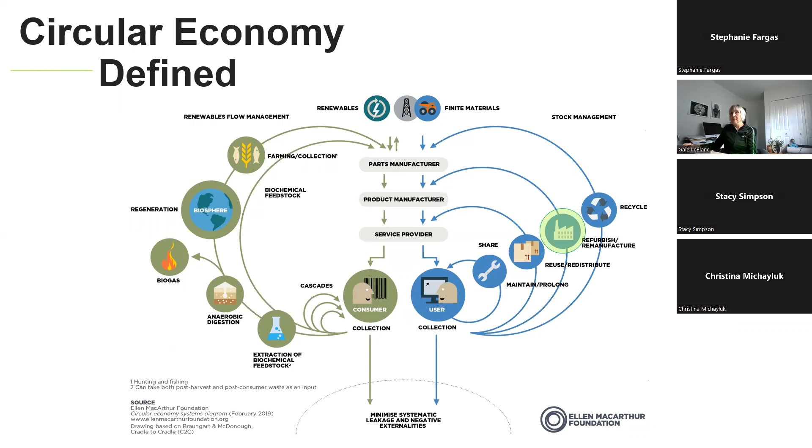So for the building sector, the circular economy principles must be at every level in the building process. When applying circular design principles, the idea is to actually close the loop by identifying the output of one system and connecting it to the input of another system. Without cooperation at every step, it's not going to happen.

I'm going to go through each responsibility or each principle. So for architects and designers, you provide and sell the vision to the building owner. So circular design actually starts with them turning concepts into designs. Architects must select the right materials, which takes a lot of research.

They must design for adaptability and flexibility to create spaces that can be easily repurposed to meet the needs of a building that is constantly changing. Designing for flexibility is just so important since it helps reduce the need for constant renovations.

So much goes into the design of a building that can actually be tied back to circular economy, such as energy efficiency, natural lighting and ventilation. Incorporating passive design strategies like proper insulation, natural ventilation, and solar orientation is essential. Also, even considering integrating on-site renewable energy systems like solar panels or wind turbines.

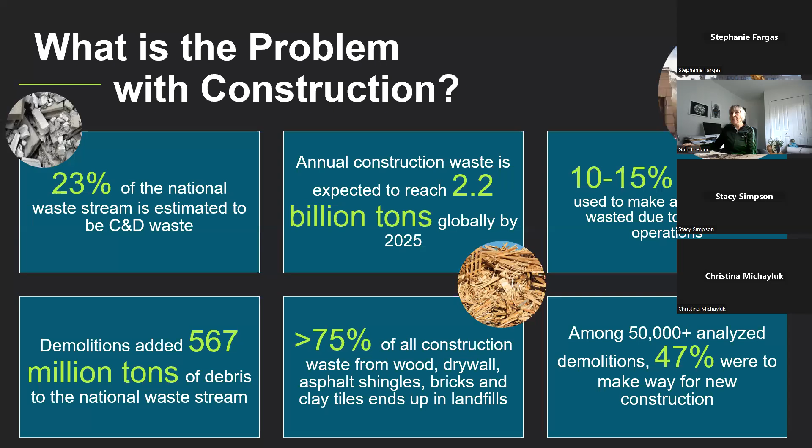Well, just because there is a problem with current construction standards doesn't mean that there has been no progress. Recycling or reusing materials reduces disposal and transportation costs, so it could be used more frequently on job sites. Efficient identification and sorting of materials is an important factor in managing the diversion of construction waste from disposal.

Job site protocols are actually usually identified in contracts and subcontracts and implemented at the project level by superintendents and project managers. Superintendents and project managers must use product specifications prepared by architects and engineers for diversion rates. Building owners and contractors may also have their own guidelines and policies. So it really is a team effort, and communication is vital.

Wood debris can be salvaged and repurposed for new construction products. Cement and bricks are usually crushed and reused. Metals like steel, aluminum, and copper can be sent to local metal scrap yards. And then drywall can either be returned to a USG manufacturing plant, or it can be incorporated into the soil or other products. Actually, right now, USG Rainier manufacturing plant uses about 10% of the clean wallboard waste back into their manufacturing process.

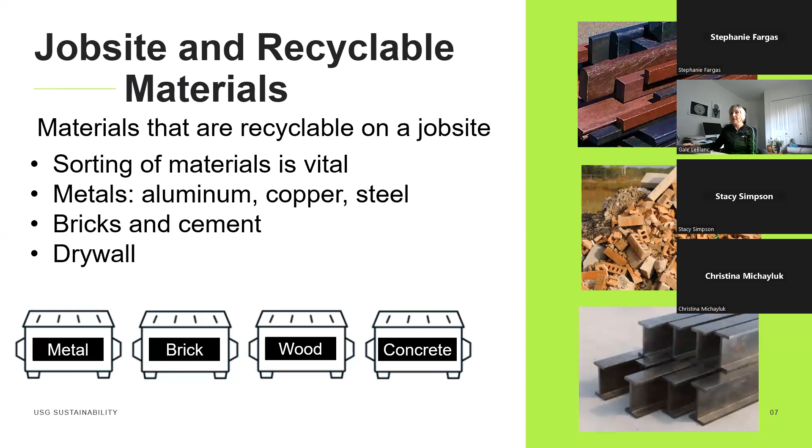Well, there are 6 different pathways to a circular economy: maintenance, reuse, refurbishment, remanufacture, recycling, and composting. My focus will be on how I can help as a manufacturer. So I will be discussing the specific pathways of reuse and recycling for remanufacturing.

The first option is to use a manufacturer's reclaim program, where the product is accepted back to the manufacturer so that the waste product can be turned into a new product. The second option is the reuse of a product at a different job site or location.

I am very aware that demo waste is a huge issue, especially for wallboard. But job site waste is also a big area of concern for wallboard waste. The consensus is that 11% of the wallboard purchased for a job will go to the landfill. Through careful planning and design, I have heard some job sites reduce this number to 8%, but that's the lowest

that I've ever heard. Most USG wallboard manufacturing plants have had the machinery to recycle manufacturing waste into the wallboard line for over 50 years now. It does take quite a bit of manufacturing to recycle wallboard back into the manufacturing line. So the carbon emission savings from recycling wallboard is going to be mostly from the end of life carbon, or when the product is landfilled.

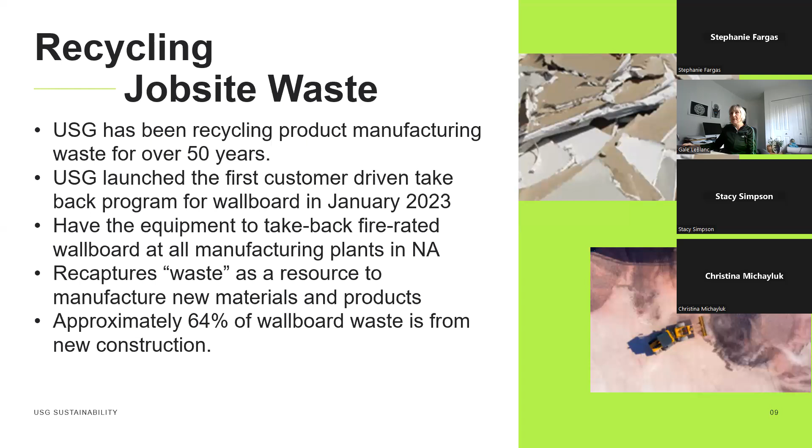It was in January of this year that we developed a public take-back program for all of our wallboard manufacturing plants. And this program has actually been my vision for the past 10 years, or since I've been employed at USG. So as said, in January 2023, we at USG started a public program to take back clean wallboard construction waste or scrap product. This means that the wallboard waste that is coming from the job site is clean, source separated, and is USG branded.

I often get asked about why just USG branded wallboard. We have to warranty the finished product, and we have a very rigorous raw material screening process where we test for impurities and heavy metals. I'm not saying that other wallboard manufacturers don't follow some type of rigorous screening. I'm just saying we don't know.

Well, the USG Recycle program is only available for regular and fire-rated wallboard. We are investing in the technology required to recycle glass mat and mold tough resistant boards. But at this time, it's just these types of wallboards that are acceptable. We can only use up to 10% of reclaimed wallboard to manufacture new wallboard, and this is mostly because of the fire rating standard. But when paper is separated from the reclaimed wallboard, there will be no limitations on the amount of reclaimed gypsum that we could actually use back into the manufacturing process.

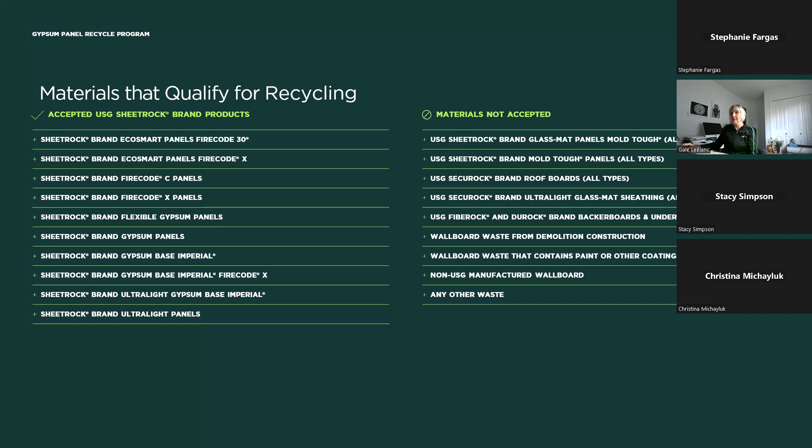So every USG wallboard plant has the resources or the technology to take back wallboard waste. Right now, we have 3 functioning manufacturing plants in Canada, and it will soon be 4. So I wanted to share some best practices from successful customers. Sorting has been the most difficult task since it is very difficult to keep waste from co-mingling on the job site. To maintain that, the container only contains wallboard scrap. Most jobs just assign an employee to police the containers.

Another customer had a plan to partner with a waste container hauler, and instead of sending each load to the plant, they plan to use a dump hub and then deliver the job site waste wallboard to the manufacturing plant when the actual large container was full.

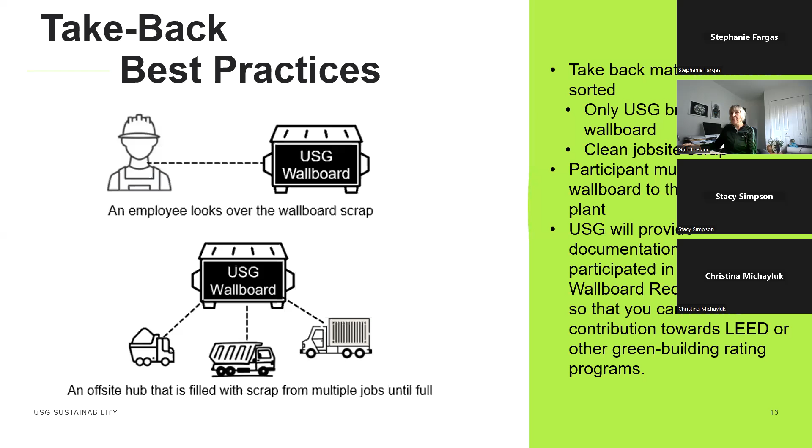Demolition waste options for wallboard. We do not currently have a wallboard demo waste program available, but I did want to mention options for wallboard demo waste. Anyone who has ever been to a demo construction job site understands the abundance of wallboard waste. Wallboard is frequently used in buildings and is approximately 14% of the demolition waste. Construction wallboard waste is usually free of contaminants, so it makes it a lot easier to use back into the

manufacturing process. Demolition wallboard could possibly be contaminated with toxic substances such as lead paint or even asbestos, depending on the age of the building. Contaminated wallboard waste does not have many options. It usually has to be landfilled. But for demo waste that is not contaminated, there are some recycling options: it could be recycled into cement or flea powder or grease absorbent, athletic field markers, and even animal bedding.

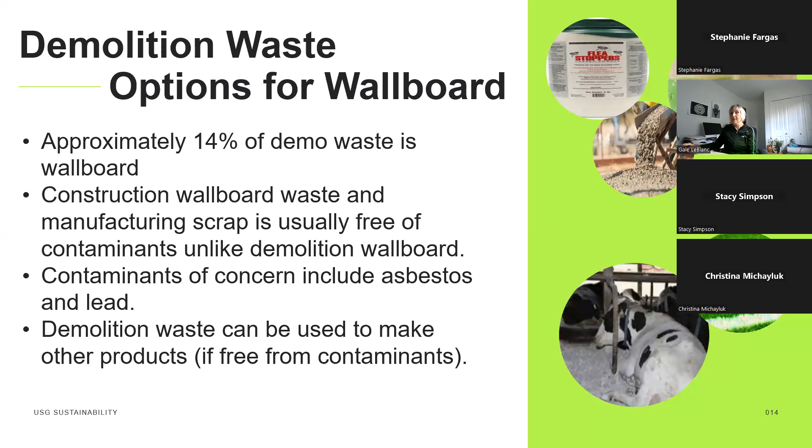Now I am shifting from wallboard to acoustical ceiling tiles. So we have been recycling demo waste ceiling tiles since 2009. We remanufacture the waste material into new products. The process for recycling is a bit stricter than the wallboard, and this is just due to the nature of the material. The used ceiling tiles have to be stacked on pallets and secured for transit. And then USG will cover freight for full truckloads. So the majority of our ceiling tile products are recyclable. We cannot take back fiberglass, wood, or painted panels. And of course, we can't take back any type of hazardous material.

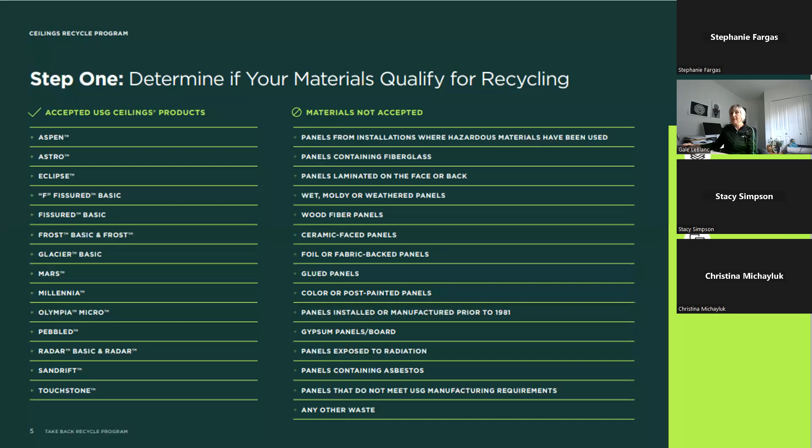We are aware that not everyone can participate in manufacturer take-back programs. It is a program that takes more manpower and time, so it will be challenging. We do not have manufacturing plants by each major city or development. So at a certain distance, the reduction in carbon emissions will be a bust, and it will not be worth it. If taking back to a manufacturing plant will cause more environmental harm, then we will be forced to refuse the drop-off. Fortunately, this has not happened yet, but we do see this as a scenario that we may face in the future.

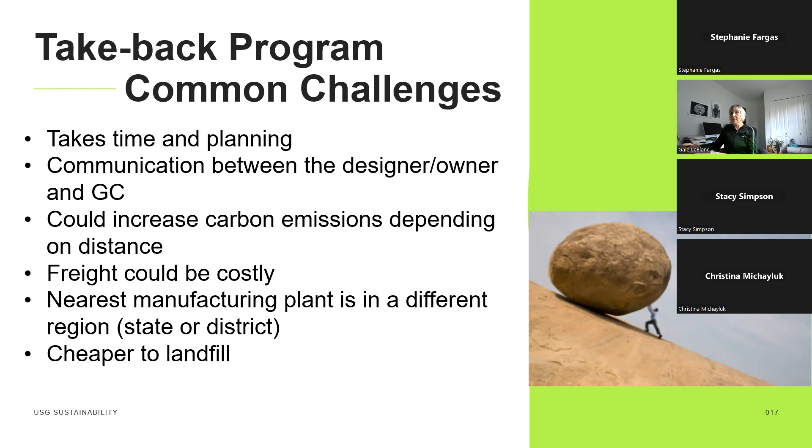So moving on to product reuse. Reuse is simply the reuse of a product without transformation. If you are looking to target carbon reduction in a building, this is the way to do it. When you reuse a product, you are eliminating not only the raw materials, but the manufacturing and packaging carbon emissions as well. This is an area that demands innovation and a different mindset for design.

For manufacturers, we create a product that is resilient enough to be able to be disassembled and withstand re-installation. A product's life is no longer a straight line from being produced to being consumed and then discarded. For building designers, it demands a change in mindset and a good understanding of the product's function.

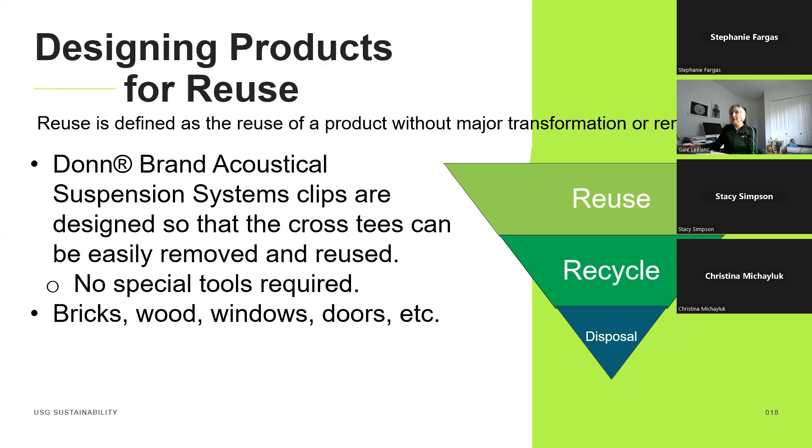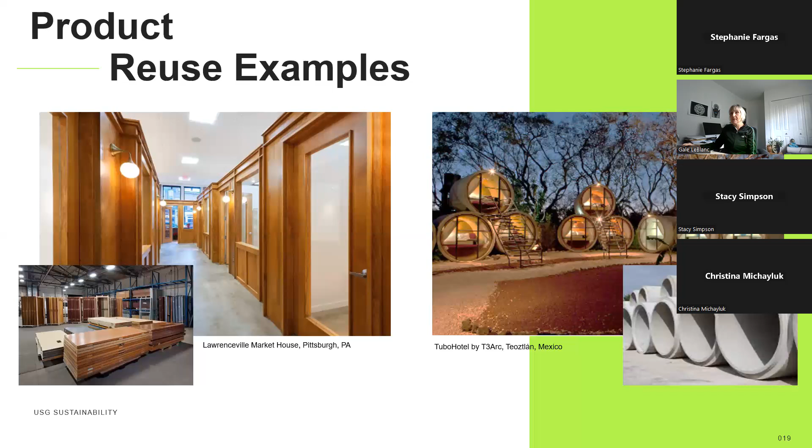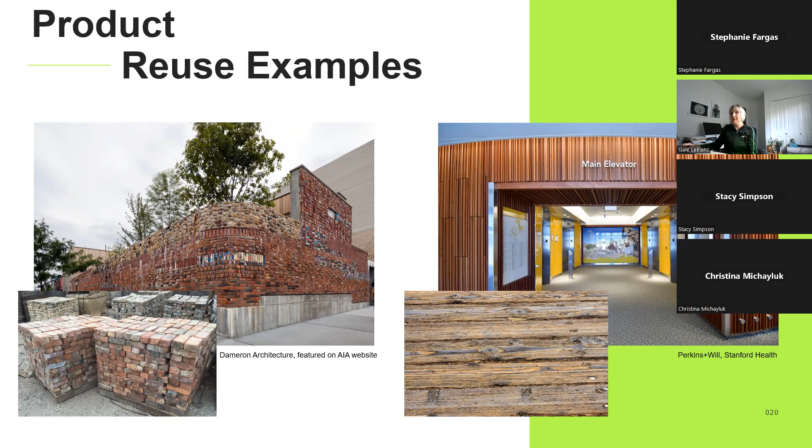So a circular economy is aimed at eliminating waste and promoting the continuous use of resources. Using recycled materials is another way that a manufacturer can support a circular economy. Using recycled raw materials removes the extraction and transport of new raw materials and the carbon emissions associated with these processes.

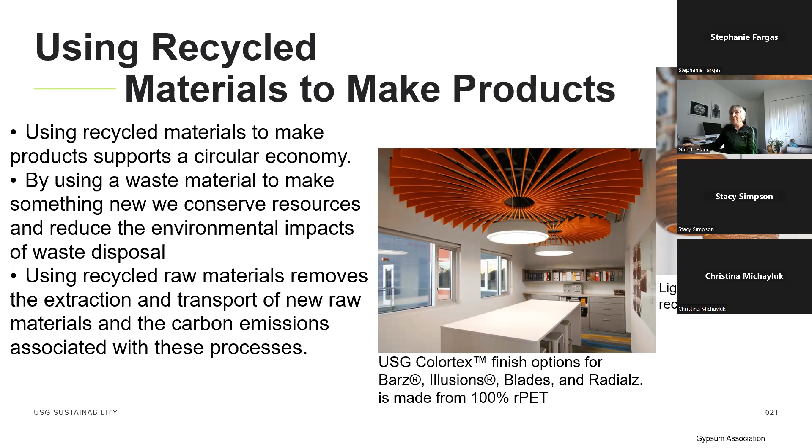Packaging is one of the most difficult areas when considering circular economy processes. Everyone owns something that is plastic. It's a material that is everywhere, unfortunately, even in our oceans. The major problem with packaging plastics is the functionality. Most plastic packaging is manufactured and treated as a single-use item.

Unfortunately, the problem with packaging goes even deeper, since the infrastructure to recycle plastics is really non-existent. Even when plastic is recycled, it is expensive to collect and sort. There are thousands of different types of plastic, and none of them can be melted down and processed together. Plastic also degrades, and the more plastic is reused, the more toxic it becomes.

Plastic manufacturers have little to no incentive to recycle or reuse their products at this time. It's far less expensive to manufacture most types of plastic from scratch than it is to recycle old plastic into something new. Companies must commit to using post-consumer resin or an alternative like cardboard wherever possible.

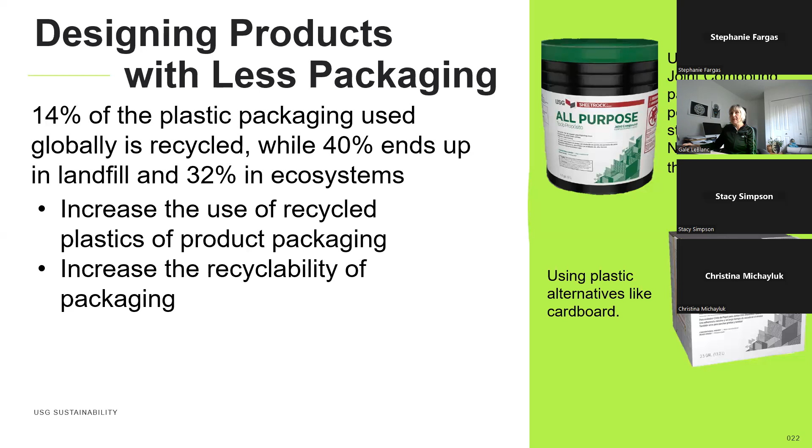So I tend to look at circular economy as a holistic approach. It addresses two very important issues at the same time. We reduce our carbon emissions or embodied carbon of products, and we reduce the use and waste of our planet's finite materials. Embodied carbon looks at the carbon emissions that are generated by the production of the building itself. This covers the extraction of the raw materials that are used, their transportation to a manufacturing facility, manufacturing, the transportation of the products to the construction site, and the installation of the products.

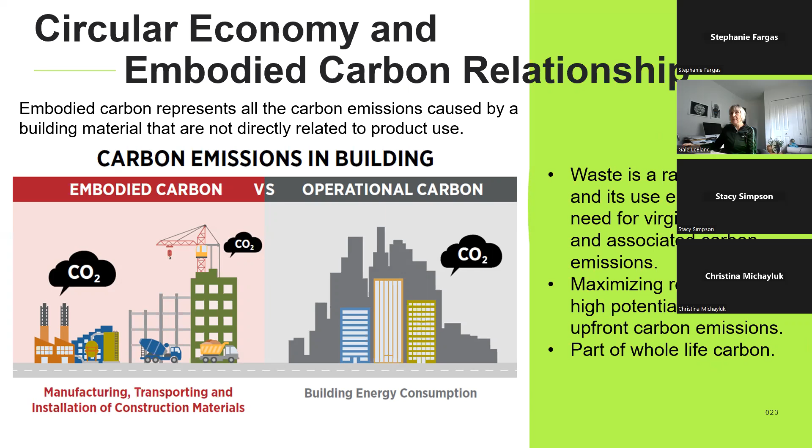Well, efforts to reduce the environmental impact of the construction sector have long focused on operational carbon, but due to the rapid decarbonization of the energy sector, which is the greening of the grid, occurring at a rate of 4% per year, embodied carbon is becoming recognized as a dominant source of carbon emissions.

Several strategies can be employed to reduce embodied carbon, such as participating in manufacturer take-back programs or reusing materials. The carbon emissions associated with the product disposal and the use of new raw materials in manufacturing, of course, will be avoided then. We cannot achieve the emissions reductions necessary to avoid the worst impacts of climate change without implementing circularity.

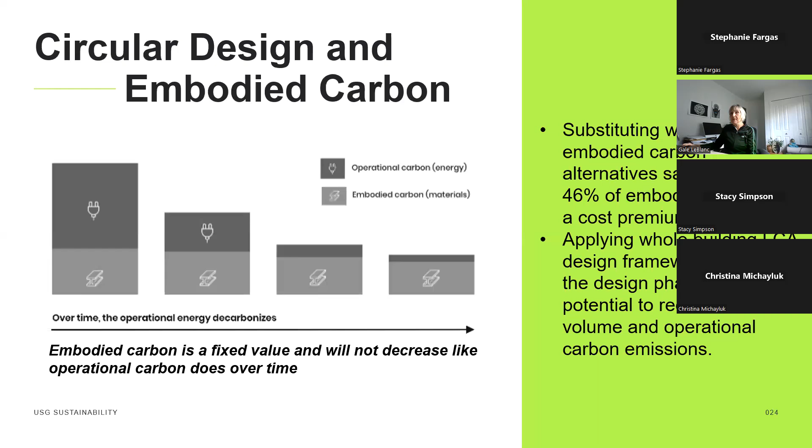So it is our job as manufacturers to be transparent about the embodied carbon of products. We produce life cycle assessments and publish environmental product declarations to provide the environmental effects of manufacturing, which includes the reporting of embodied carbon. We also are responsible for displaying our EPD information on third-party sites like EC3 tool and within our BIM models.

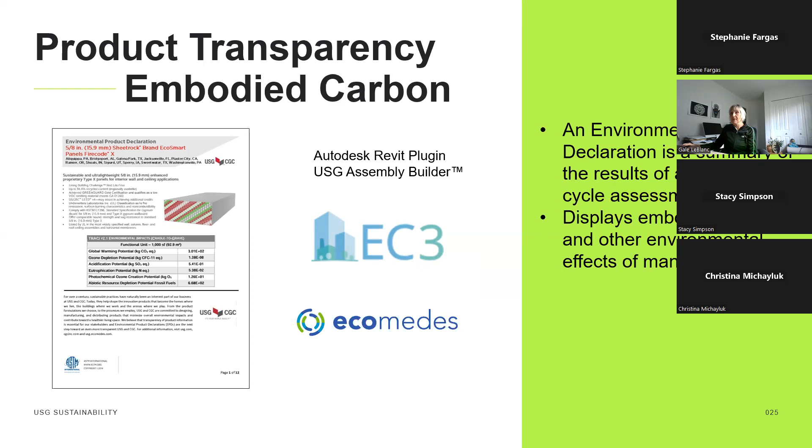So this is just for demo purposes only. I wanted to just display the differences in embodied carbon as more reclaimed material is added to manufactured wallboard. It is USG's long-term goal to recycle all gypsum board. This would be both clean waste and demo waste. So at some time, no gypsum board would be landfilled.

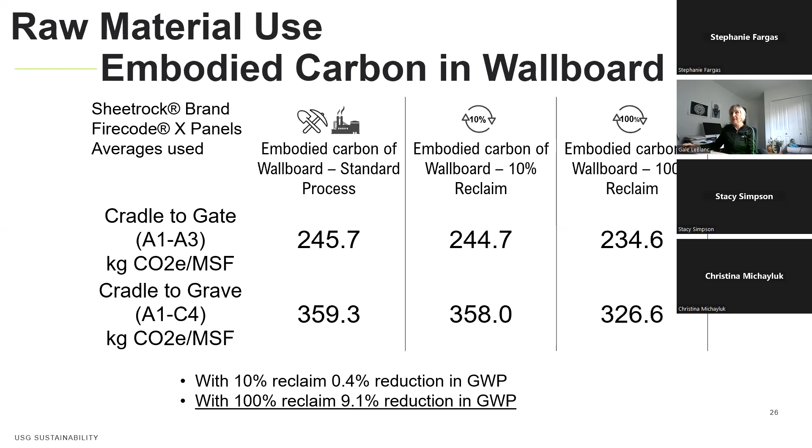So this is an example of a real-life job that participated in the wallboard recycle program. The job site in Des Moines, Iowa, recycled 20 tons of USG wallboard job site waste back to our plant in Sperry, Iowa. And it actually resulted in a decrease of the A1 to C4 carbon by 17%.

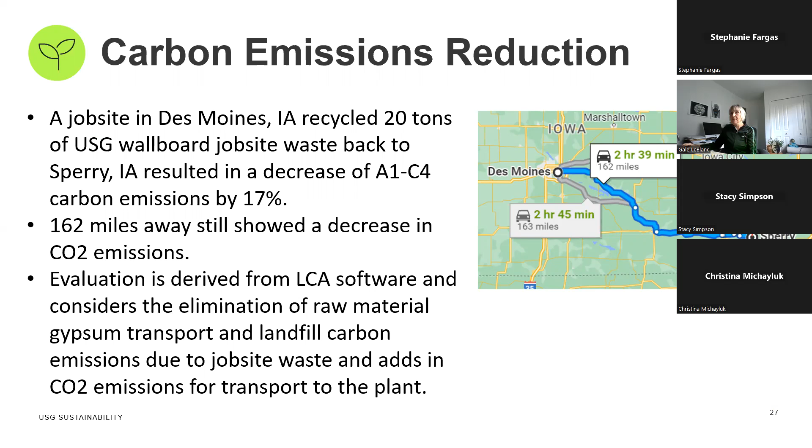So building LCA is a science-based method for quantifying the lifetime environmental impacts of a building. It is used to measure and reduce the embodied, operational, and whole life carbon of buildings. It is often needed to achieve green building certifications and comply with regulations.

A building LCA is the most efficient tool available to measure circular ideas as well as the embodied and operational carbon emissions of any construction project. A building LCA is part of planning regulations in many countries like Sweden and Netherlands and France. And it is incorporated in several building certifications like LEED.

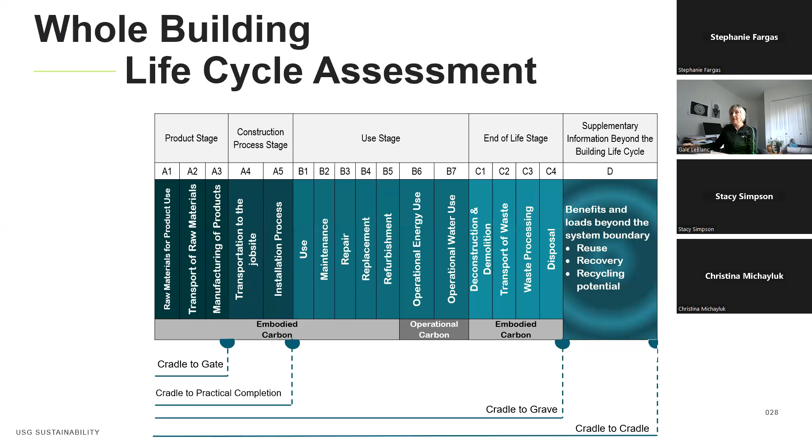So where do project teams start? There's an opportunity at every design phase to incorporate procurement standards, like the reuse of materials. At the concept design phase, it is helpful to use a carbon estimation tool or model with Carbon Designer 3D. I have found Carbon Designer 3D to be useful since not much information is needed to just get a rough estimate. A comparative LCA can be performed at the detailed design stage and uses more accurate and relevant data.

Then the most accurate data is performed after the construction and procurement stage using the actual building metrics and the EPD results for all the building materials that were used in the building.

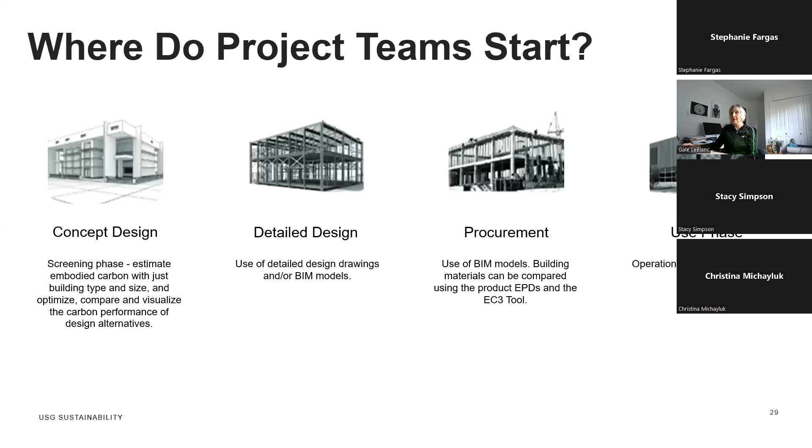So reviewing circular economy and what is the future for manufacturers. So first and foremost, customer demand drives the building product market. The more customers demand sustainable building material options, the more manufacturers will respond in producing more sustainable building material options. We know we need to close the gaps, and there is a lot of work to do.

Products need to change to use less resources, to be more resilient and repairable. Packaging needs to change to not be as wasteful. All in all, there is a lot of work to do for manufacturers.

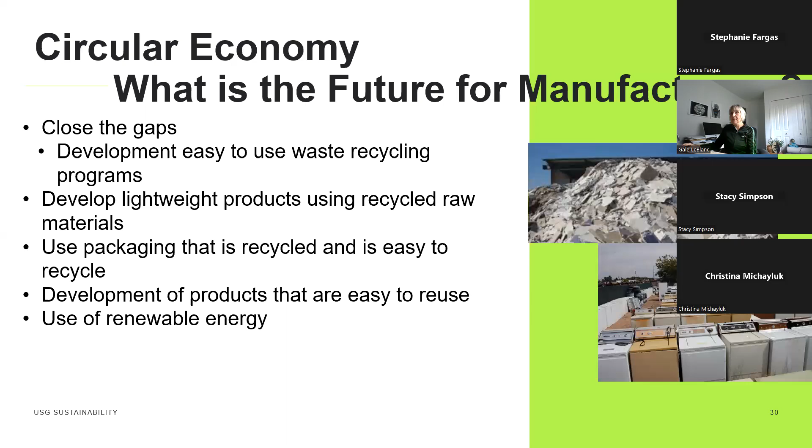So what's the future of buildings? There are significant system barriers and existing inactivity that must be overcome here. There are market and cost challenges of transitioning to a more circular built environment. Our construction and real estate sector in North America has actually been compared to the fast fashion industry. You know, it's fast, it's cheap, and as a result, it's unfortunately not very resilient.

There exists a lack of awareness and understanding of the circular economy as it relates to the built environment. The marketplace for recycled materials is often regional, creating challenges for mass procurement. Inconsistent policies and regulation framework creates challenges. There is a huge inconsistency and lack of care for waste.

So what exactly needs to be done? Integrating circular design principles from the very start should be done. Increased education and awareness of circular economy, which includes procedures and benefits. More collaboration so that everyone on the job site has the same goal. Leveraging digital technology like BIM modeling and One Click LCA. Then we need supportive policies and regulation, because not much will change unless there are government or state regulations.

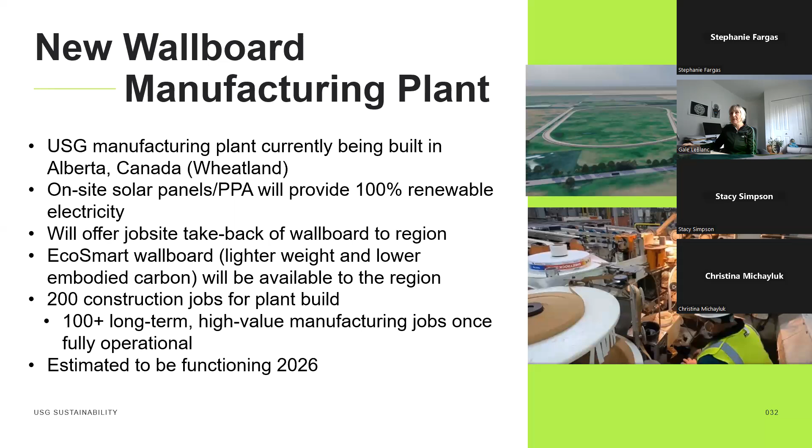Well, we at USG released our 2030 sustainability goals in 2022. And one of our goals is focused on delivering a circular economy. So USG has actually diverted over 1.5 million metric tons of wallboard in the past 10 years from going to the landfill. And this is through take-back pilot programs and waste recycling.

While we are very proud of our numbers, we are dedicated to continue the research in this area and really innovating to drive the real change. If you are ever interested in using the recycle program for wallboard or have any questions about it, I do welcome you to reach out to me at reclaim@usg.com.